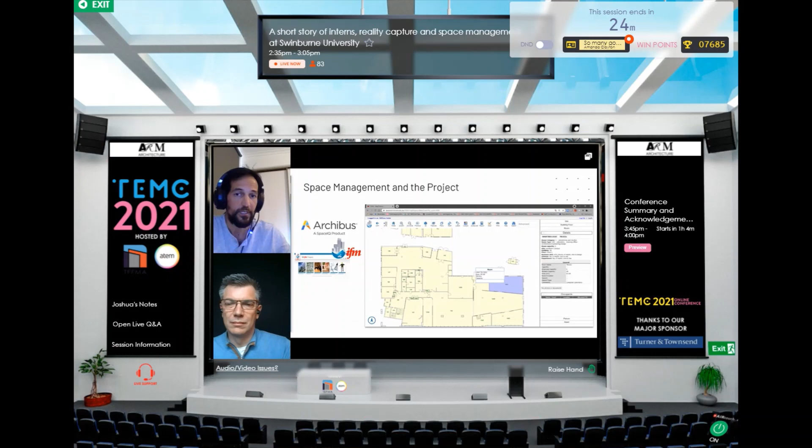In addition to this, we've developed an integration with our people and culture system, Workday. This is to assist us with allocating staff in a space and desks, efficient people management, reporting, and also move management. We also have a great ambition to steadily move towards the use of building information modeling principles. This is to assist in an integrated facility management approach throughout the whole life cycle, from tendering major projects all the way to day-to-day maintenance activities. The goal for Swinburne is to improve project delivery by enhanced 3D visualization, tracking abilities, reporting, planning, digital information handover at the end of projects, and so on.

So while this project only occupies a small corner of what I've just described, this is also in line with our long-term BIM ambitions.

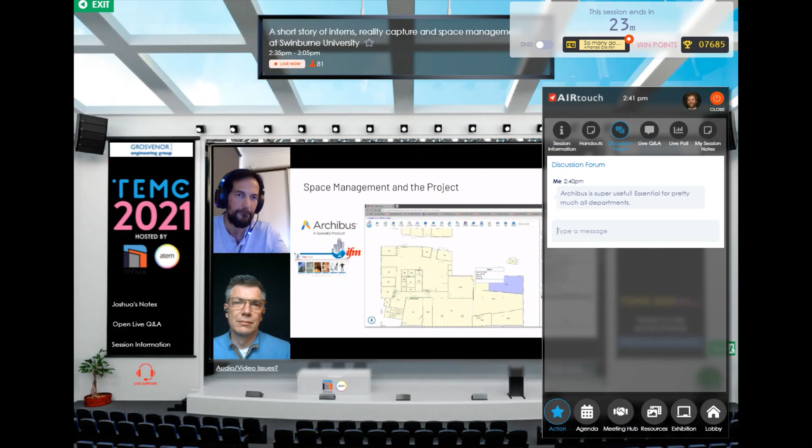Early 2020, we had COVID-19 and it had an enormous impact on us. Working from home became the new business as usual, not a special circumstance anymore. It prompted the need for better visuals incorporated into our space management system.

Greater than before, even. Visuals that allow staff and students to inspect spaces without the need to be on campus. And the question we asked ourselves was, can we make this more useful? Can we give more than a static photo? Can we provide more information visually to enhance our user experience?

Being short on staff and financial resources during this difficult time, we needed to be creative and seek resources already available to us. We came together as a team and determined how best to proceed. We needed to ensure we remained focused on solving a problem within the strategic context. In other words, we were not going to throw resources and technology at a project just because it looks cool or impressive.

We will have more on the technical solution and the broader context in the third part of the presentation, but the solution we arrived at involved a scanning technique called photogrammetry that quickly converts photography into virtual 3D models.

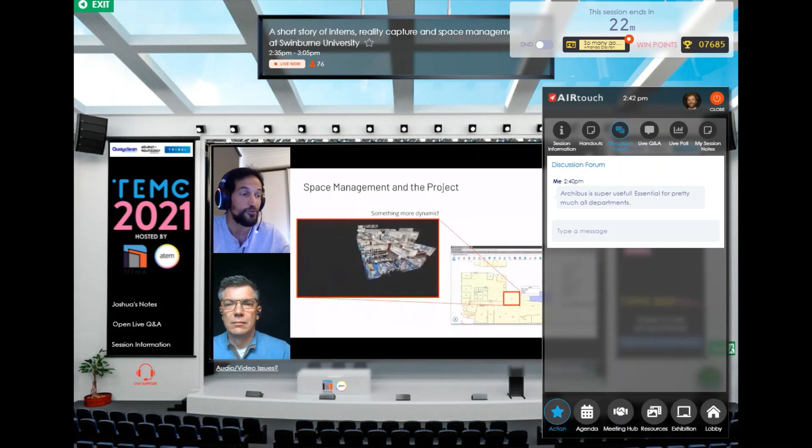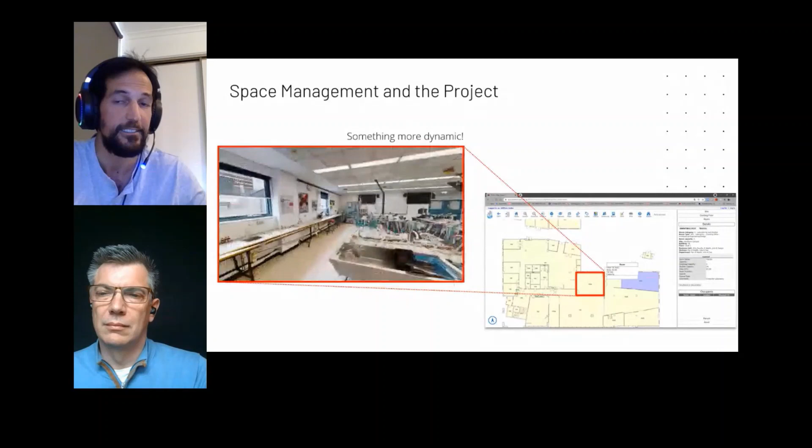So what are the advantages of this? The virtual 3D models that are created allow users to look up and down and measure heights and widths. Also see spaces, how they connect and relate to each other, to understand the relationship between the spaces. The model also has the potential to give access to other information, for instance, the ability of this space to be an interface to a web page, to videos, databases, health and safety material, and so on.

The tool used to capture the spaces is a proprietary system called Matterport. You may have seen a similar solution used in online real estate virtual tours. We will review more on Matterport later in our slides.

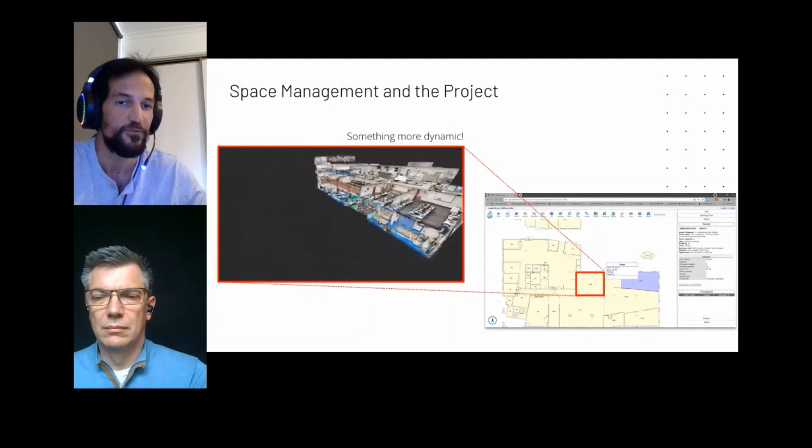This now brings us to the next part of our presentation, where we approached two of our most precious assets, WIL program students and subject matter experts in BIM, to whom we were grateful to have as part of the Swinburne community.

One of the most important parts was working with our work integrated learning students, Horace and Sonal. Not only were they both fantastic at learning and helping to deliver what we needed to deliver, but the WIL program also offers benefits and opportunities for our students to exercise their learning in a real-world environment.

To help resource the project, we took advantage of our comprehensive WIL program that offers a range of opportunities for both students and industry to mutually benefit from each other. Some of these programs are professional degrees, partnerships, internships, industry-linked projects, accreditation placements, and overseas study tours. We picked the internship program as we thought it suited best relative to our timeframe and requirements for delivery and also financial resources.

Through consultation with Wil Jaski, we laid out the project objectives and developed our project plan. We welcomed our WIL students to the project. We provided them with support and training materials, and that's how we started.

Now I would like to invite you all to hear directly from one of our fantastic interns, Sonal Shalia, on her experience through the project in the following short video. Then you will hear from Wil Jaski to take you through the aspect of digital engineering technology and BIM and how that could shape our current project moving forward. Thank you.

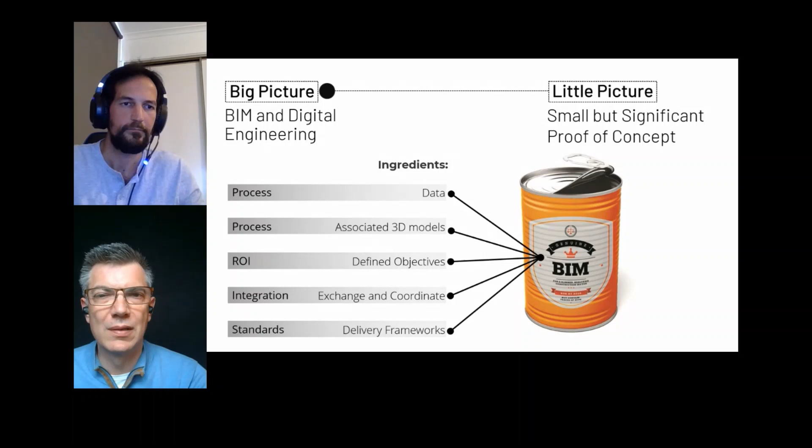And in relation to that last concept, this is something BIM nerds like me have been very pleased about since 2018, which was the ISO standards on information management and BIM. These standards originated from the standards developed in the UK to enable their government mandate for BIM, and we'll talk more about that in a minute.

So, standards, good thing, let's tick that off.

The next thing in understanding the big picture is where the best place to control the process and derive benefit from BIM is. You might be familiar with some of the great things BIM can do for designers, engineers, and building contractors. It has a huge impact on the construction industry for vertical buildings and horizontal infrastructure.

What I think is super important to know is that whilst BIM provides these benefits for the supply chain, one of its greatest impacts is its potential in supporting asset and facilities management. This is the ultimate position for control and benefit.

If we imagine that those in asset and facilities management dip down into project delivery to update or establish new information, we can also imagine that they are at the base of the greater things that are possible. Information management is all part of the foundation of digital twins and our future cities.

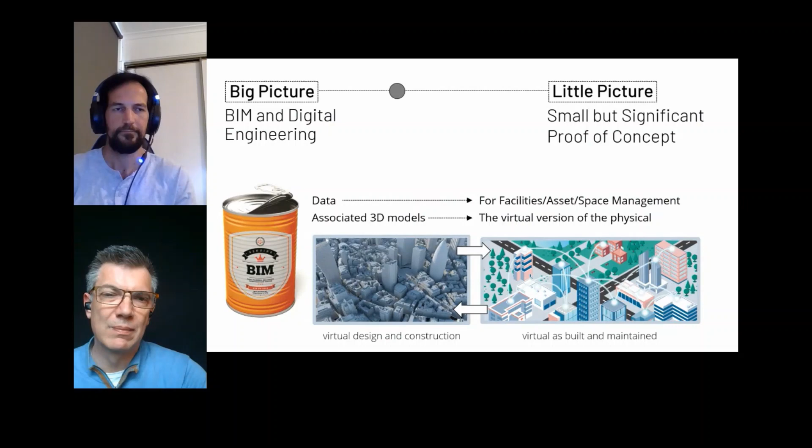When it comes to these virtual models, the question of existing facilities comes up. How will I create my virtual version of the physical that already exists? There are two main routes that can be taken.

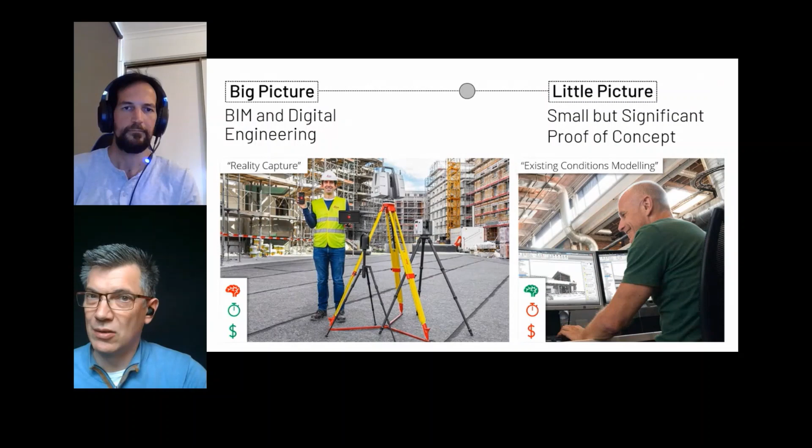So hopefully you can see now we're just getting a little bit closer to our proof of concept. And for our proof of concept, we went the scanning route.

Now, a little bit more information on scanning. The investment in scanning can be significant, into the many tens of thousands of dollars. On the right-hand side, what you can see is an entry-level laser scanner that looks like a bullet. These are lovely little devices that sit somewhere over about $30,000.

Next to that is a scanning device that uses photography instead of lasers and is roughly about one-tenth the price. The process it uses is called photogrammetry, and this equipment is what we use to capture space for Swinburne Space Central.

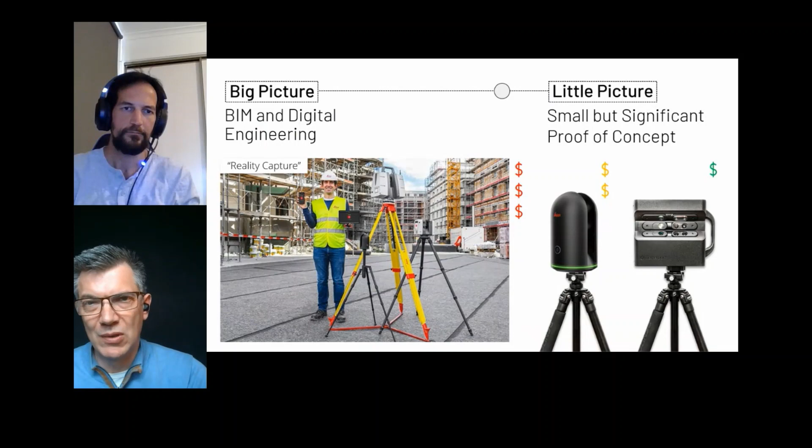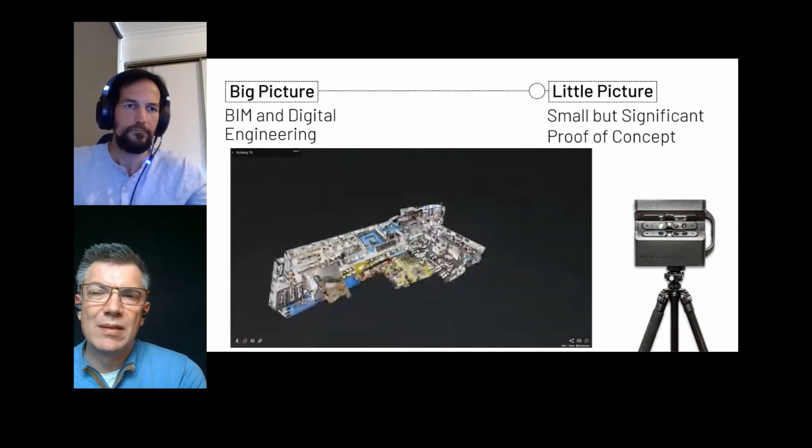And what you see now is the work produced by our work-integrated learning students. Scanning equipment is placed at numerous points along corridors and in rooms where multiple photographs are compiled. This is then repeated and each scan point joined to the others as the building is surveyed.

The entire scan is then uploaded to the cloud-hosted platform provided by the manufacturer. At this point, software identifies the common features in the photos and builds a 3D model which can be viewed, as we can see here.

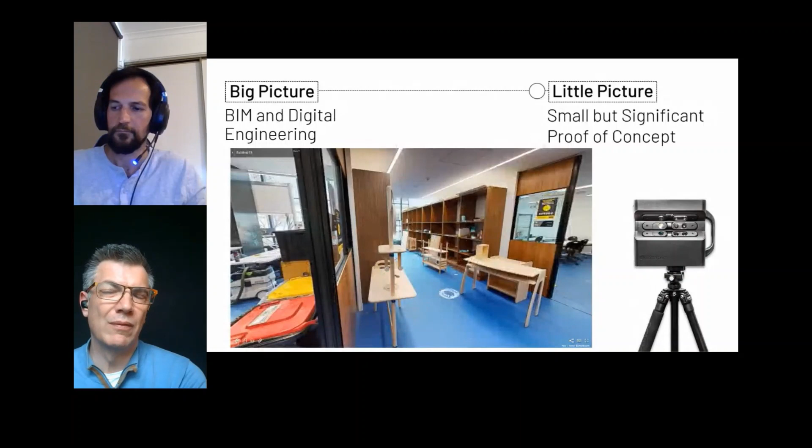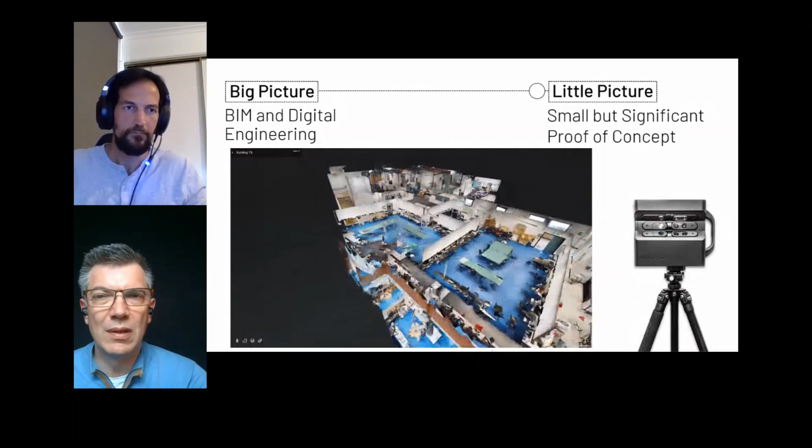To improve the visual experience, the walkthrough visuals use panoramic photos at each point a scan was made, as the model can look not very tidy and a little bit incomplete if we're looking at the model only. This 3-level building took 2 days to complete once our work-integrated learning students were familiar with the equipment and processes. Matterport allows you to see the building as a model, as a walkthrough, or in plan, level by level.

Some things that Matterport allows us to do out of the box: one is to create tags, placed at any location. Text, links, and videos can be incorporated and viewed in full screen when clicked upon. Because there is a reasonably accurate 3D model created, Matterport also allows measurements of spaces so that users can check clearances - say, for example, if you're moving heavy equipment, you can check those before you actually get on site.

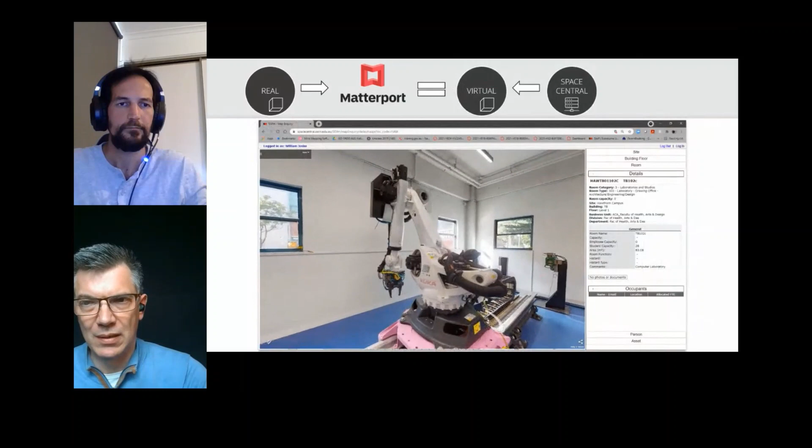Our implementation of Matterport was to link individual room records in Space Central to the corresponding scanned rooms using what are called deep links. Deep links can be collected for each individual room within a building, and then each added to a new field, button, or icon in SysFM. These links could also be sent to others independently of Space Central - for example, for a maintenance contractor, it could be provided in an email with other work order information.

For students who are to be inducted into a learning space that has certain risks and protocols, it could be shared during an online lesson. The teacher can then guide, and the students can explore not just one space, but all the adjoining spaces as well.

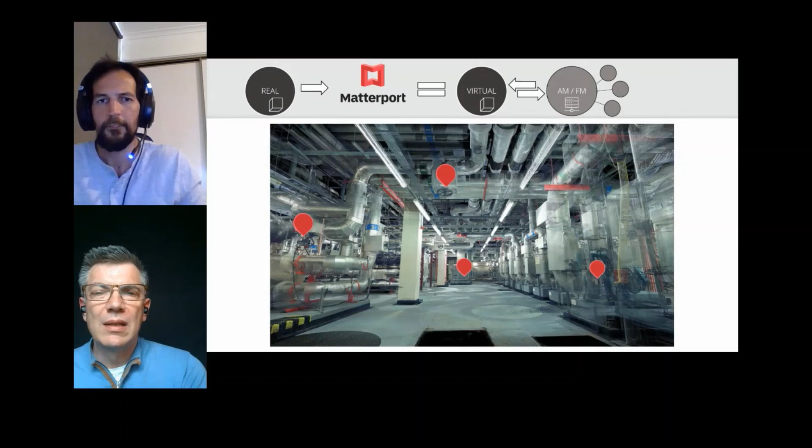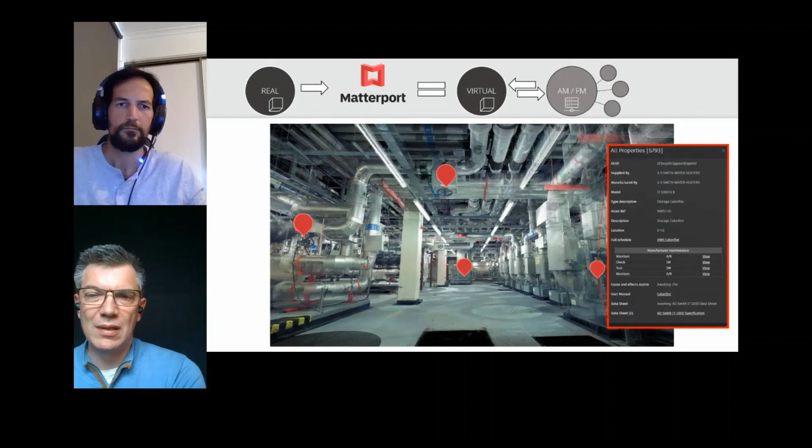The use of a virtual model to provide the experience of a space can also act as an interface to other information, and that's a key use case in facilities and asset management. By linking different sources of information, such as asset registers, work orders, condition assessments, OHS and hazardous materials warnings, there are many possibilities to be explored. I think this will be one of the ways in which our proof of concept will be measured for success - does it create conversation and engagement from which the next innovations and solutions are defined.

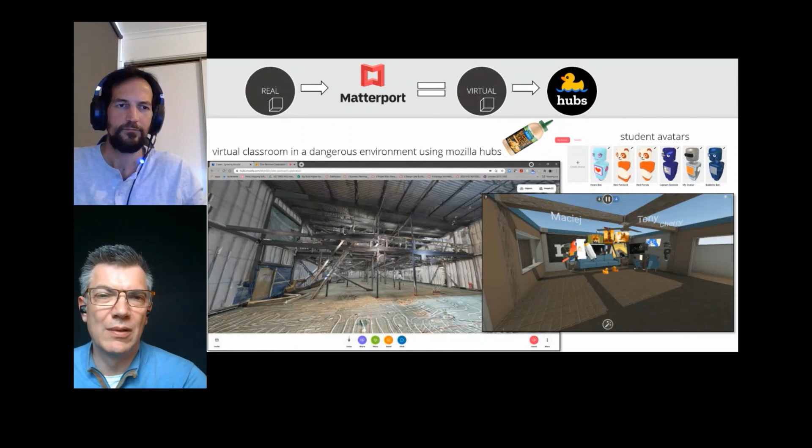So, what are some of the limitations? What have we learned? Accuracy is not so much a problem for us, as our main criteria is to see and experience the spaces. If accuracy of the models created from scanning was a priority, we would choose laser scanning over photogrammetry.

Earlier I showed how tags with more information can be made. A future possibility is also creating tags or hotspots that could link to other information. With photogrammetry and Matterport, this is all manual effort - there is no intelligence that would allow us to see specific equipment or know a certain space, know what it is, and automatically directly link information about it.

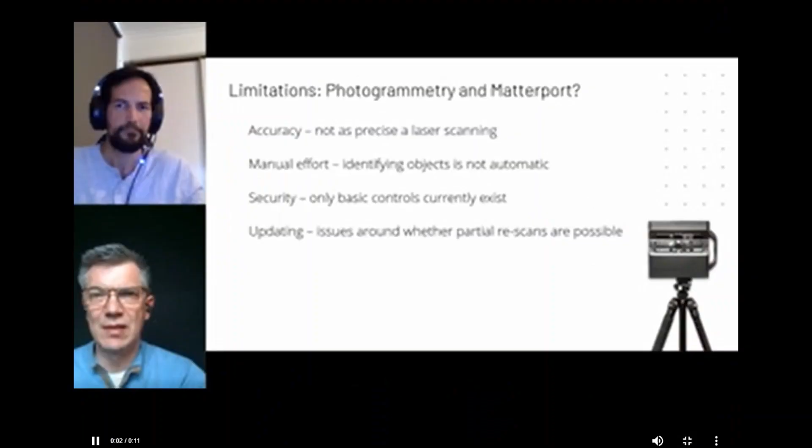Security is a large concern also, and how to control who has access to... right. Updating scans over time may also be an issue. At this time, if there was a desire to rescan part of a building - for example, a new art installation in a foyer of a building - then there is a risk that the entire building would need to be rescanned. This might also put at risk any tags that have been placed manually into that model.

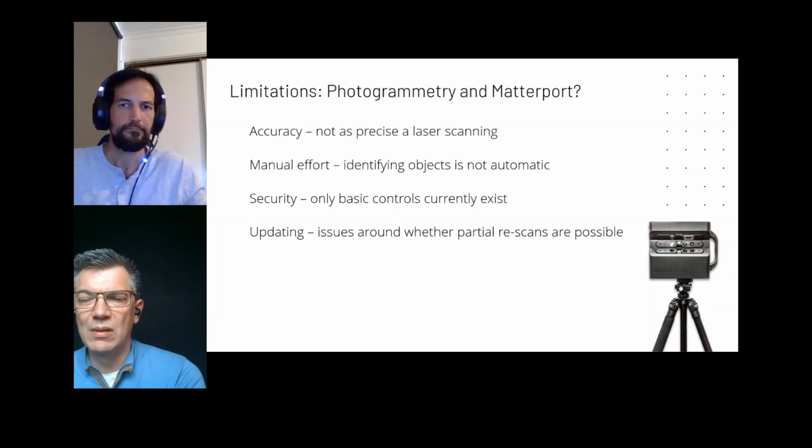These challenges can be overcome with different approaches and strategies. The key thing is balance - is the value in having the virtual spaces available worth the resources to create and manage them, including some of the limitations that currently exist? And that's what we're working on.

And that is the end of the presentation. If there are some questions, we look forward to answering them.

Thank you. Thanks very much, Will and Amir. We've got one question that's come through. We've only got a couple of minutes left, so let's start with that one. Steve Haywood asks, what method do you use to transfer the asset data from the BIM system to your asset management system for future maintenance?

We don't have that built into this proof of concept at the moment. We're only looking at using a scanning methodology to create a user experience connected to the space management system. So whether or not using Matterport is a sensible approach to linking asset information to the FM database is yet to be seen. It may not be the correct route to go, and that's part of the exploration we're conducting.

Great, thank you. Everyone else is just saying thanks, fantastic presentation, etc. There was one question that occurred to me, from the context I've been dealing with: how much of the project was accelerated, advanced, or maybe even blocked by having to work from home and the pandemic restrictions generally, especially for students?